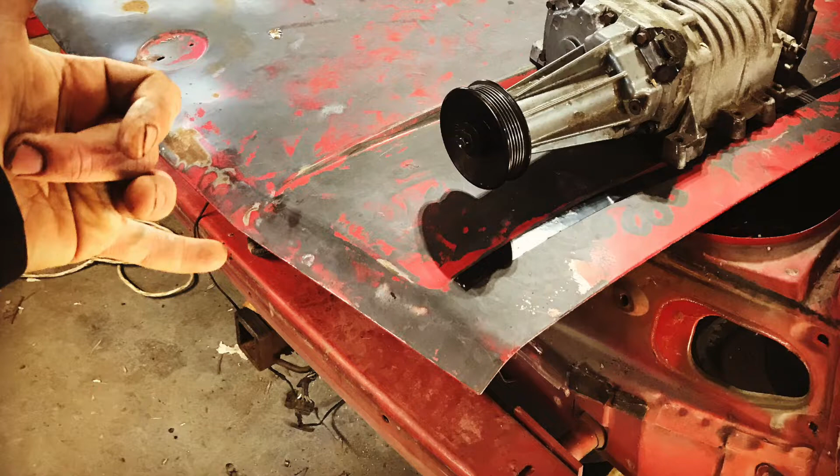I don't know exactly how I'm going to structure a lot of these videos because there is so much to do, but today I just wanted to show you what we have going on. I'm saving up to get floor pans again. That's the beauty of YouTube, I can be completely honest and feel like I connect with you guys, and I don't have money for floorboards right now, so I'm doing stuff I can do until I can afford to buy those. If you saw the last video on the Foxbody, we stripped all the sound deadening out of the floor.

We found a really ugly patch that I cut out. There's some rust there, so we're going to take care of that. I'm going to talk about this section right here first. So we cut this out of the roof. You can see somebody looked like they welded it shut at one point, and it was just a really bad rust spot, so we cut that out of here.

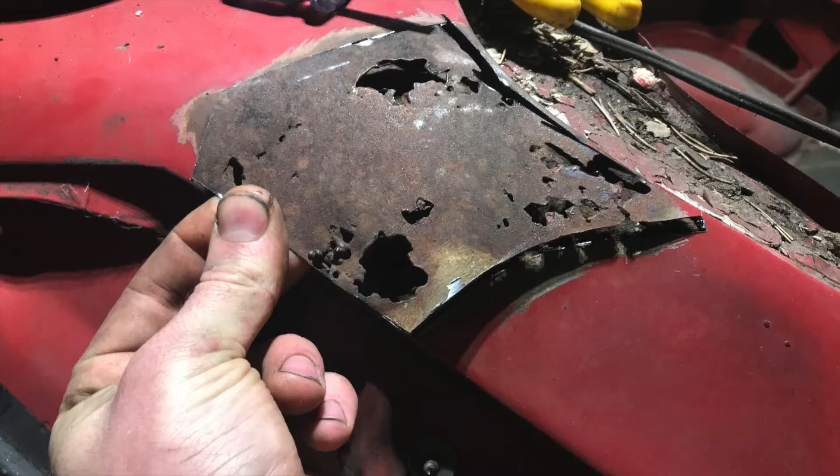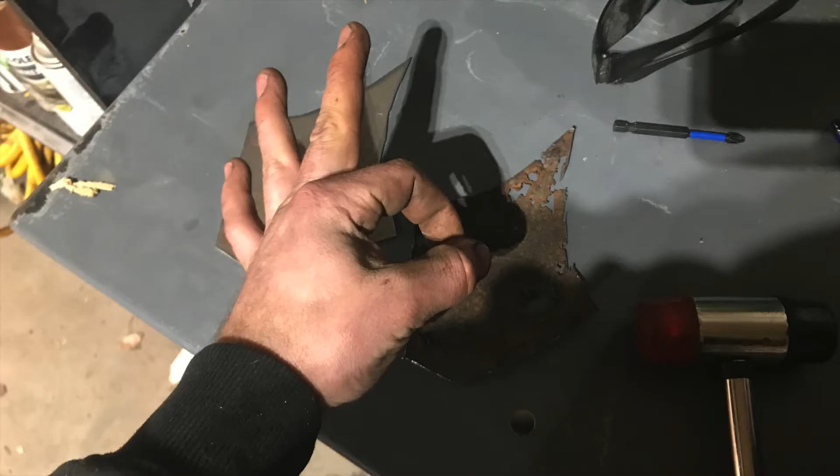I'm going to insert some pictures right here. That's what we did. So we're basically recreating that piece of metal.

It kind of sucks because up in this area of the roof there's lots of different curves and bends, it goes a lot of different directions. So this is probably one of the most complicated spots. If it was rusted more down here, it'd be nice and easy, flat, cut and dry. This, not so much.

So what you're looking at right now, what you just saw in the pictures, this is about 3 hours of work. I'm going to flip the camera over and show you about how close we are.

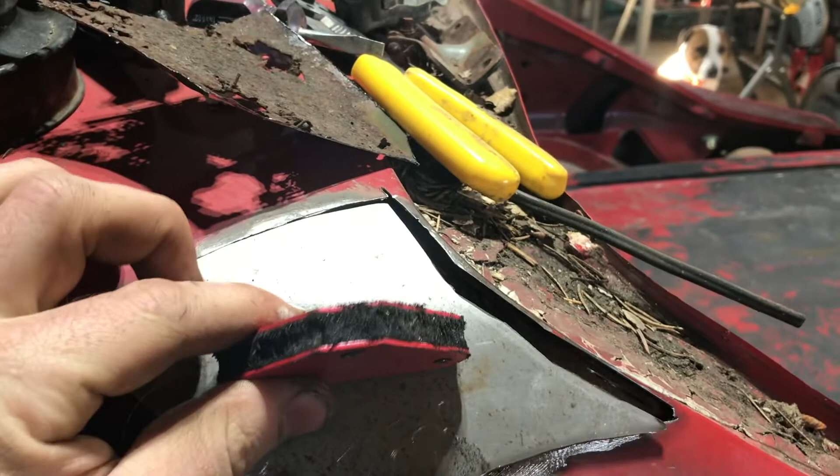You can see it's not perfect yet. I got some low spots right here, and a lot of what you're seeing has to do with how these magnets are holding this. If I take one of them and put it in the center, I can kind of adjust it, and you can see it's actually pretty close to what we need. Not exact, but it's getting there.

I'll have someone hold this with one magnet when I tack it in. The goal is to have as little Bondo as possible, so I want this to be really close. You can see down on the bottom I have a little bit of a high spot. This end over here, the skinny end, needs to come up. But yeah, this will get welded in there, and then we'll have to skim coat that with Bondo.

I got a lot of different angles going on. This is about 3 hours worth of bending and grinding and nicking little pieces of this off. Many minutes later, you can see I had to cut a relief right there to get a little bit of curvature on that.

Underneath here was pretty solid. I knocked out the 2 spots that were not solid. I'll fill these in as well, and then we'll use that POR-15 product over the top. So that's kind of where that patch is coming in. You can see just how ugly this was before. Then we'll get this welded in here just like that.

Bruh. You a good shop dog? Or are you a bad shop dog?

Foxbody, twin supercharged, alright, couple other things we're planning for the Fox. I got this hood right here, which was from a 79 to 82, which is kind of the look I'm going for on this car. So I'm not keeping it all original. Obviously we're putting 2 superchargers on it, so I'm not worried about that. Like I said, the interior isn't going to be stock either by any means. We're going for a street strip kind of application, so I don't really give a shit about keeping it original.

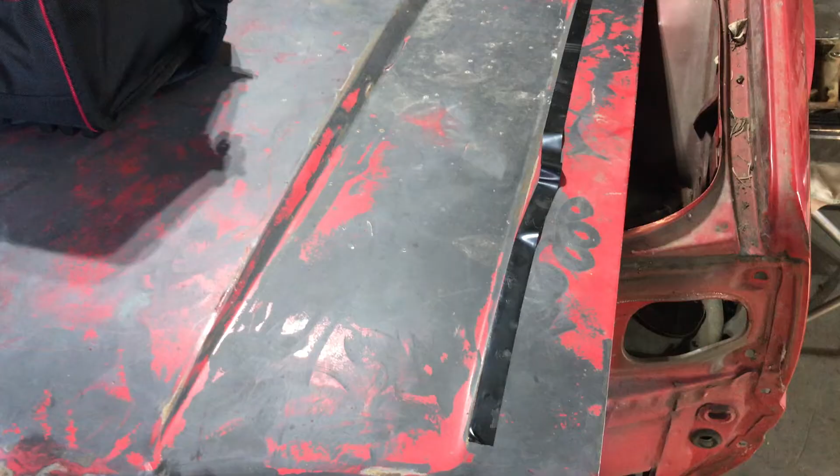But you can see I have this electrical tape laid out. I'm going to flip you guys around and explain my plan for this hood. You can see it already has a small cowl in it, but I'm going to end up cutting where this tape line is all the way up over there on both sides and making my own cowl hood. The reason for that is there are no cowl hoods out there wide enough for our superchargers to go in, because I have a rough idea of where they're going to get mounted.

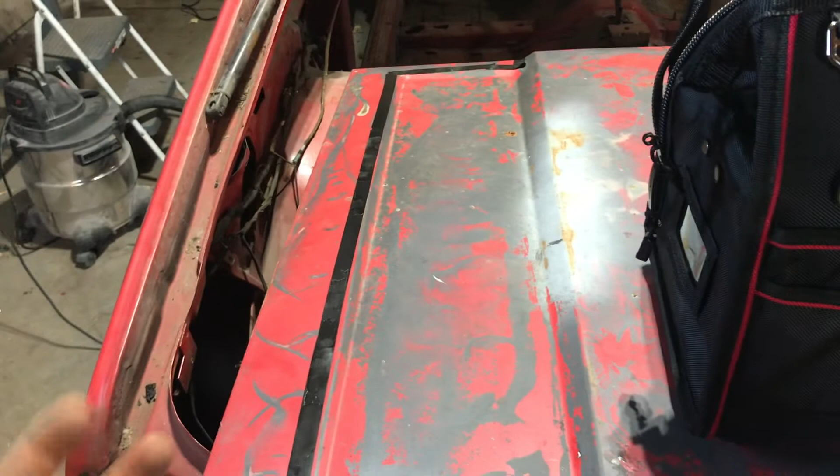Again, these are going to be remote mounted superchargers, meaning there's a plate under them, superchargers on top, intercooler piping into a carb hat on the intake. So the idea is that the superchargers sit just above the valve covers. So if I grab it... oh, it's heavy.

Be nice to have help sometimes. There's gonna be one blower on each side, kind of like this. Obviously it'll be set farther back, but you get the idea. So the cowl has to be wider than what I can find.

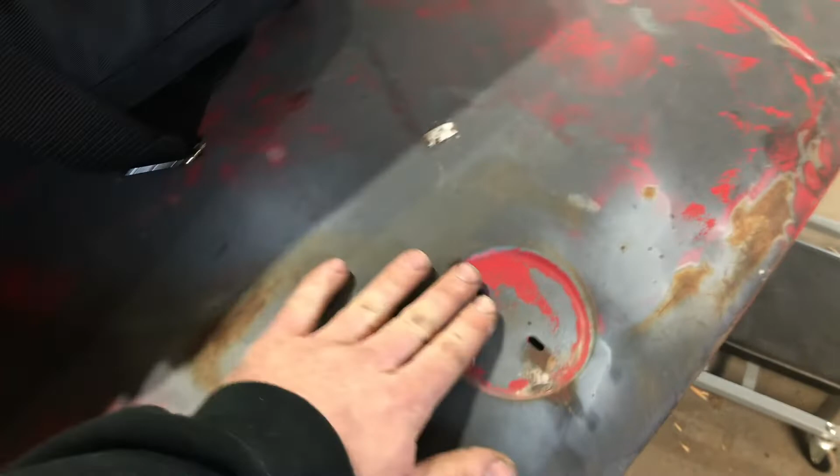Basically what I'll have to do is cut this and take a pie shape and put it through so that it bumps up, and then we'll have to do a little bit of Bondo work with that as well. But this hood already needs some help. What do you think, you guys? I don't know if I want to put the 79 through 82 Mustang logo back in here or shave this and just make it smooth and paint over it. Let me know what you think about that.

Stove warm, Doug? Is that why you're sitting by it? We got a nice little fire going in there. Oh yeah, good fire.

Yeah guys, so that's where we're at. I'm not doing a ton of super exciting stuff right now, it's a lot of planning to get to the actual stuff we need to do. Like I said, I'm saving money for those floorboards. Then we'll show you how to weld those in there and coat the floor and the whole inside of the car. And then we'll put it up on the rotisserie, because when I'm crawling around coating the floor and the headliner, I don't want it up in the air where I could potentially fall.

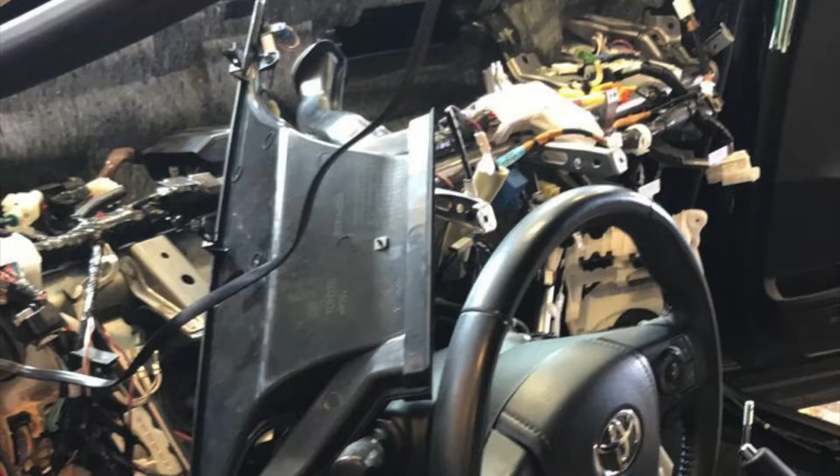So I've been dealing with some of that stuff. One of the things I really like, you guys, is this is incredibly simple in here. These cars were not complicated at all. I'm gonna insert a picture right here - that is a modern RAV4 that I was putting a heater box in, and it was just awful. I just don't understand why shit had to get so complicated. This is so nice to work on.

I do know why the stuff got so complicated, but people ask me all the time, how do you go home and work on your car? And it's like, you know what, sometimes I don't want to. The Mazda pickup sat in here forever because that was kind of like a normal project, it was like being at work. This isn't like that. It's simpler, and it's more of an extension of your personality.

This is a dream of mine, you guys. I've always wanted to have a Foxbody, specifically a 4-eye Foxbody. So to finally get to work on one and see it progressing, even if it's slow, is really cool.

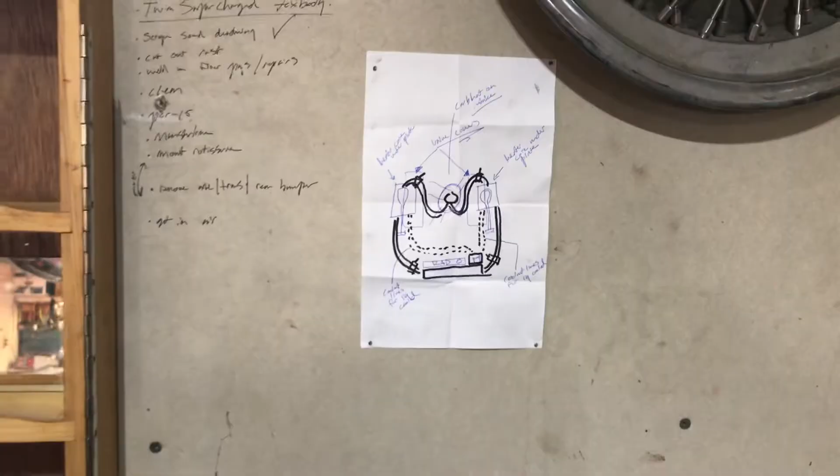Here's a really quick, shitty representation of why we need that cowl. So this is my radiator, my intercooler. The superchargers are gonna be right here and right here. These are supposed to be valve covers. So what's going to happen is these superchargers are going to be sitting on a steel plate, which is going to have a heater core under it for an external cooling system, which is this dotted line.

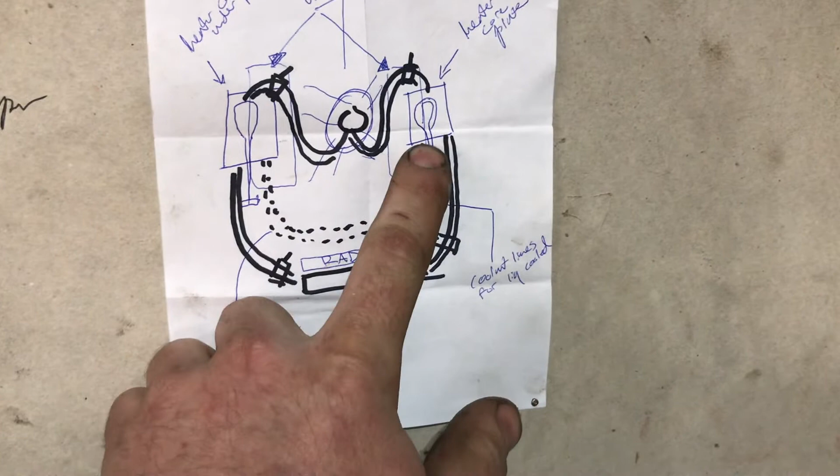There'll be a pump right here, an external pump, and a water-cooled system that runs through here. You can see that the intercooler piping goes from the intercooler up to the supercharger, and then it's going to go into a carb hat. I found a K&N carb hat that has 2 inlets. So you can see we're going to need that cowl hood because the superchargers are remotely mounted. Instead of the cowl being here, we need it to be out here.

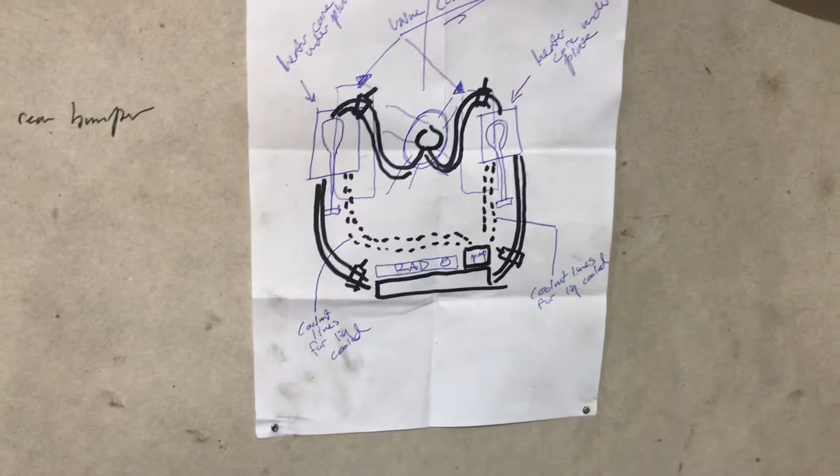Again, this is just a really rough idea, just so you guys can kind of see it and so I can keep track of what I'm doing. I probably have 10 of these laying around, but just to give you a better idea.